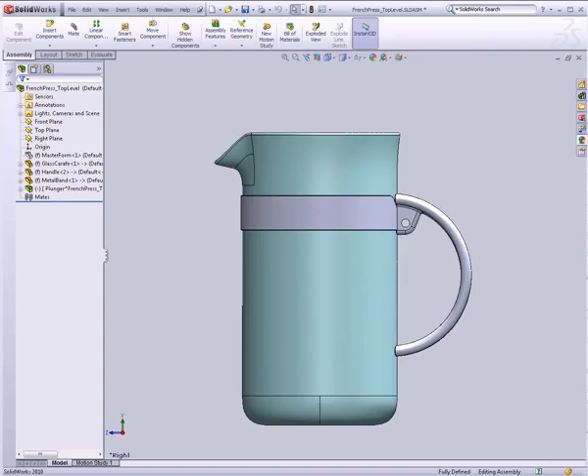Let's see if we can get this plunger in here pretty quickly. I'm going to hide the glass carafe for the moment and open up our little plunger subassembly. And let's look at the plunger bottom plate. That's going to be the simplest of all of these. And I'll just make sure in the surface bodies I want to show, well, this one. This little circle down here.

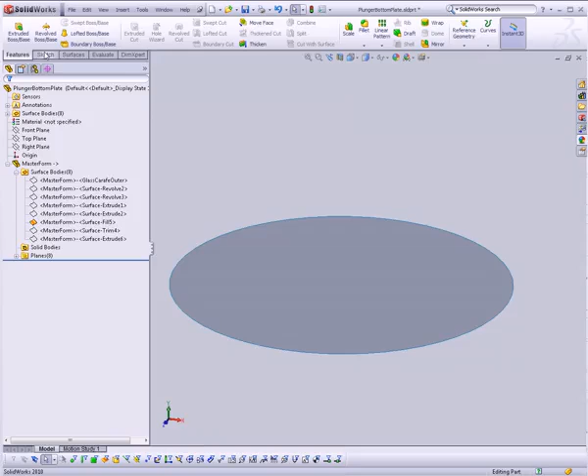And all I'm going to do is go to Features, Thicken, click on the surface, and I want to thicken it by maybe 3/4 of a millimeter. So it's pretty thin. And now I'm going to go to the top plane. Well, actually, let's go ahead and sketch on the plunger bottom plane. There we go. I'm going to draw a circle.

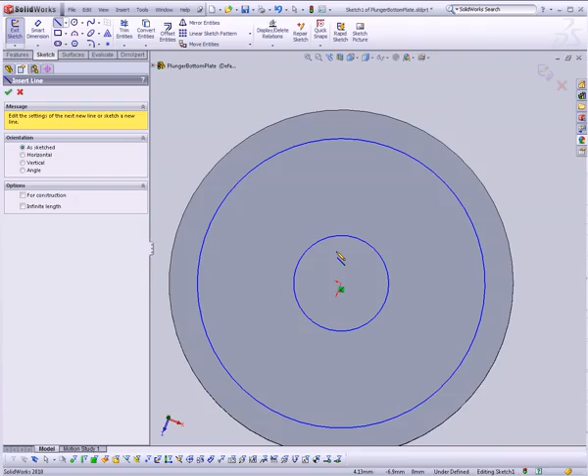And I'm eyeballing this, by the way, because I know what it looks like, and what it looks like is good enough for this part. This part doesn't have to be mechanically accurate or anything like that. So I'm going to make a vertical line off to the side, make a horizontal line as well. Then I can use this tool right here, Trim Entities. If I click on that, then I can just click on parts of the sketch to delete them.

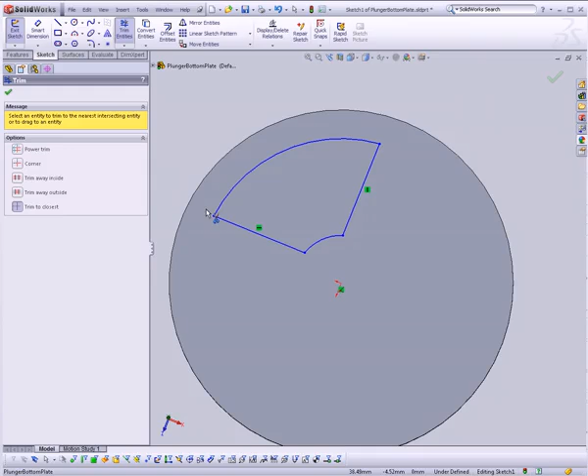So we have a little hole that we can use to cut out in our geometry. I'm going to go ahead and also add a 1/4 inch or 6-ish millimeter round on these corners. It looks like that's probably too big. Maybe we'll do 4 millimeters. That looks a little better.

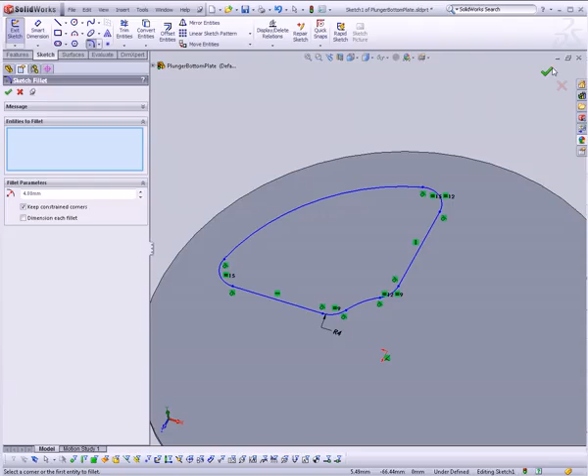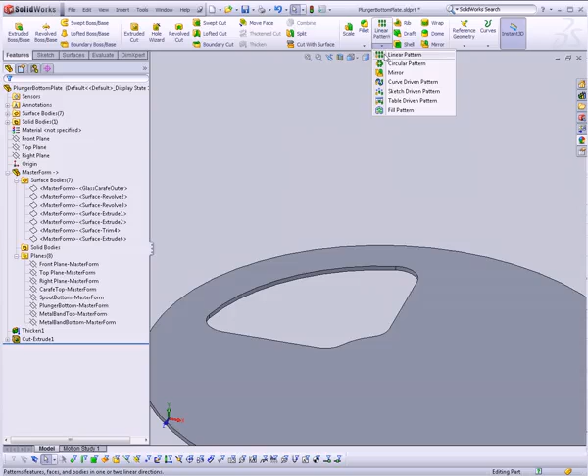And click OK. So now I have my sketch, and I can go ahead and go to Features, Extruded Cut, use that as my cut. I'll use this button over here next to Blind to flip the direction, and I'll just say Through All, so that it'll just go through all of our geometry, but no further. And finally, let's go up here to where it says Linear Pattern. I can drop down, and there's actually a circular pattern as well.

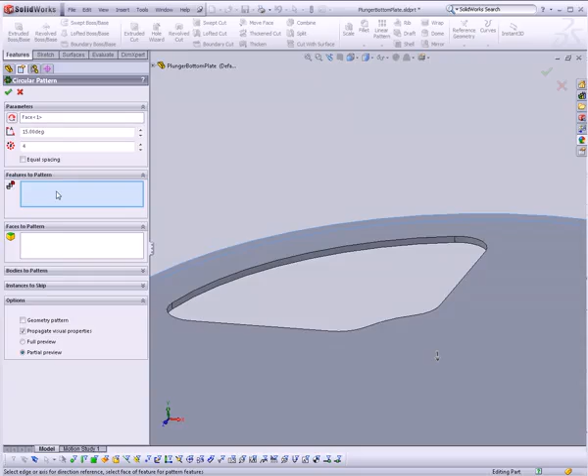And for the center of our circular pattern, I'm just going to choose this outer surface, because since it's a perfect cylinder, SolidWorks knows to use the center axis of that cylinder as the center of our rotation. I'm going to choose Features to pattern this time. Instead of bodies, I am going to pattern features, and I'm just going to choose this Cut Extrude. As you can see, it's duplicated it 4 times, which is the correct number. We just have to set up the angle to 90 degrees, so we'll get 4 of them all the way around. And there we go. That should take care of our bottom plate.

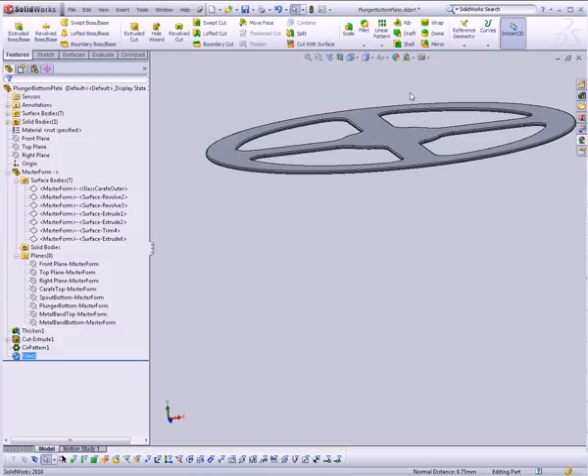I will go ahead and also add 1/4 millimeter radii on both faces. Again, because once we go to render, that will actually look a lot nicer. Close this up, and we have the bottom plate of our plunger. Now I just got to move on to the next one. So let's go ahead and do the plunger screen next.

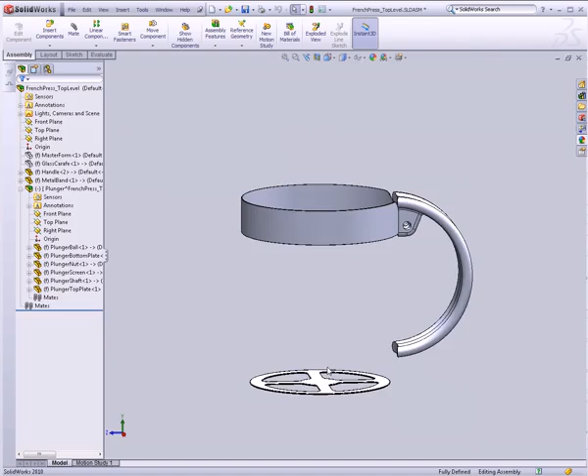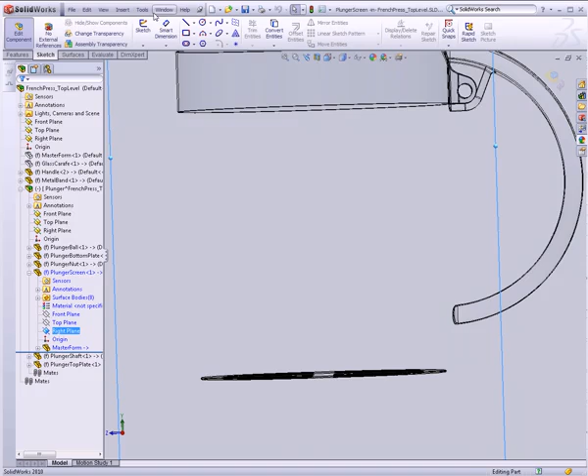This one, actually, why don't we edit this one in context so we can see what we're doing a little better. So instead of opening the plunger screen, I'm just going to click, right to the right of open, this one with the little blue rectangle on it. It says Edit Part. Click OK. And that will edit our part in context. So we can actually just work with it right here. And so on the right plane for that part, I can sketch.

Now when you're working in context, you have to be very careful. You do not want to do things like constrain a sketch to an external part. Do not do it. It will be tempting, but do not constrain anything to anything else within the context of an assembly. You will be sorry that you did it. You'd be much better off constraining only within your current part.

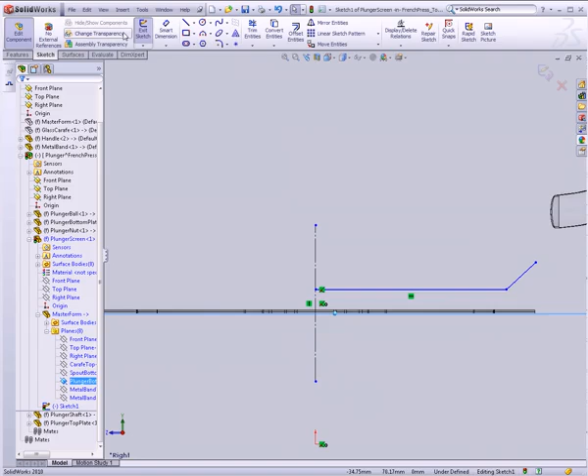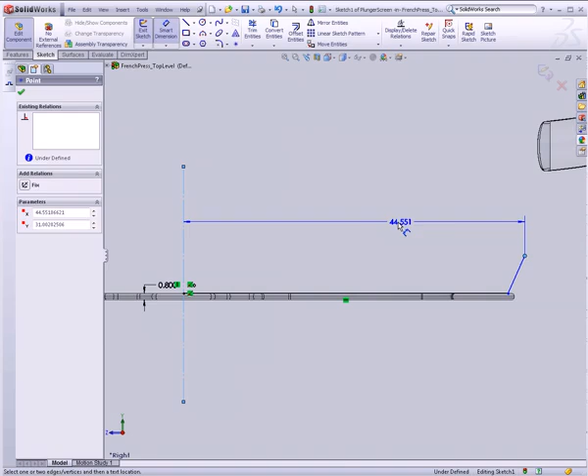So we'll grab our plunger bottom plane and make this maybe 0.75 millimeters. In fact, just to make it not touching, I'm going to make it 0.8 millimeters. And this outside edge is kind of unimportant where that is. Just make sure that this is small enough. Let's say 1.7? 1.7 inches.

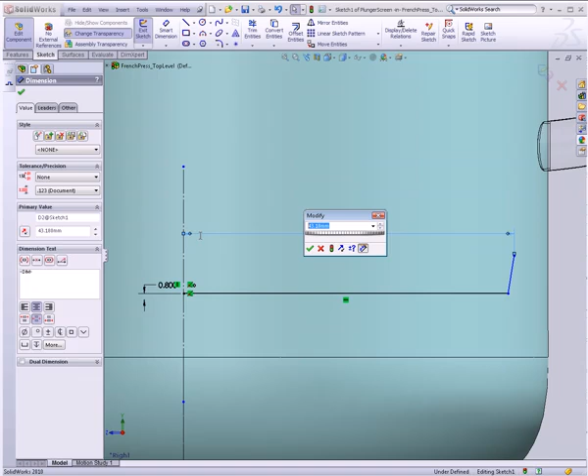And let's go ahead and show our glass carafe actually now, so we can see where its edges are. And I can click on the glass carafe and tell it to change transparency, so it'll be kind of ghosted. Makes it a little easier to see what we're doing. So I can bring that up to maybe 45 millimeters, something like that. Perfect. And we'll just add a fillet to this corner.

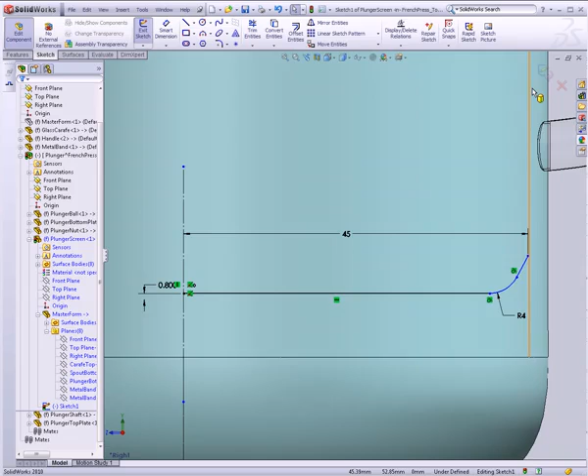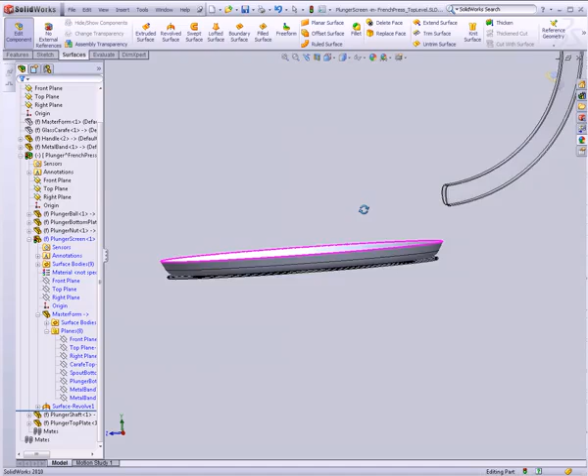Hide the glass carafe again. And now we can just use a revolved surface to create what's going to be our screen. And we'll just go ahead and go 360 with it. Now the screen, I actually don't want it to be dimensional. I'm just going to leave it as a surface body, because in Modo that'll be easier to work with when we're rendering.

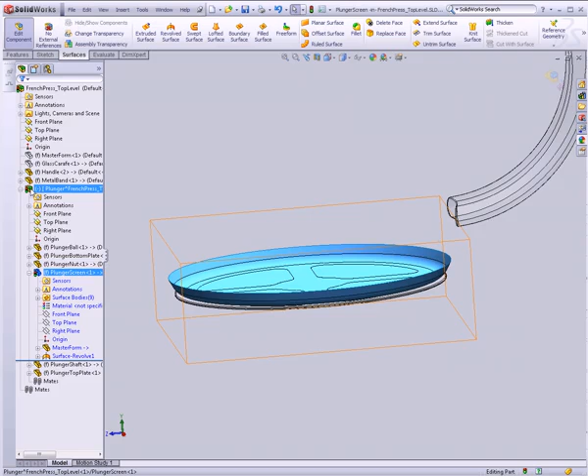So we're in the context of this assembly right now, and the way you can tell that is, A, the history bar is right here in the middle of our assembly, which is kind of weird. B, you can see the little stoplight on the top level, telling us we're editing that. It's also on the plunger, telling us we're editing that, and then it's on this plunger screen because we're editing that. So if I click on this button here, that will bring us back into our main assembly.

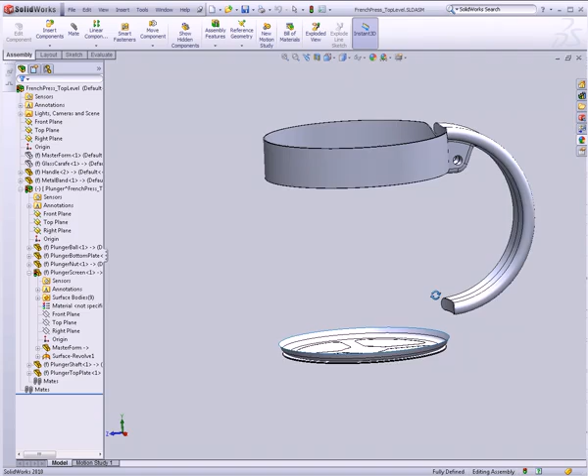And I can click on this guy. There we go. So let's just go ahead and save all. We have one more part that we need to add to this plunger, which is the plunger top plate. And actually we're going to add that in a separate video. So let's go ahead and do that.